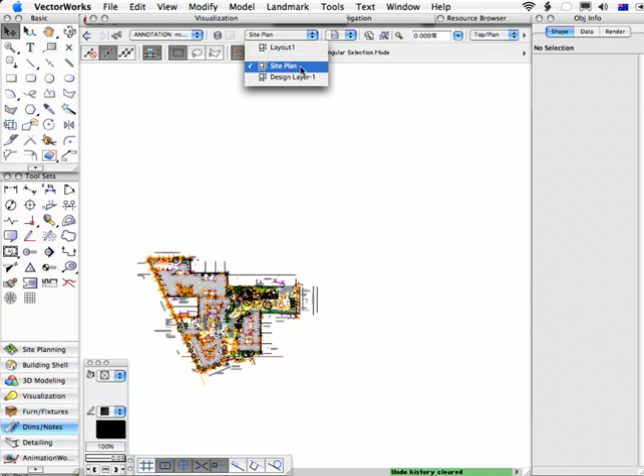And if you do that, then you're going to see the base data that was used to create the AutoCAD file. And let's zoom in here, and you can see that we've got this file imported. Now this looks pretty good, but the next thing that you must always do is to check that it is imported at the right scale.

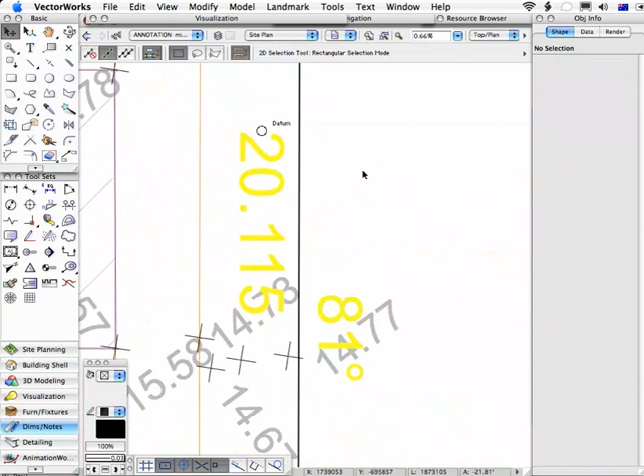And you can see here in that yellow writing there's a dimension written against this line here, and the dimension is 20.115, and that's written on this boundary line from this point here. So if I click on that line, it should say 20.115 in the object info palette, and it actually says it's got 3 zeros on the end of 20.115, which means that this drawing is not scaled correctly.

In other words, it's 1,000 times too big, and that is because unusually this survey file was actually drawn in millimeters. Even though the dimensions are being displayed in meters, the drawing was drawn in millimeters. So there's two ways that you can fix this. You can re-import the file with the knowledge that you actually had to reset the units to millimeters in the import dialog, or you can rescale the drawing.

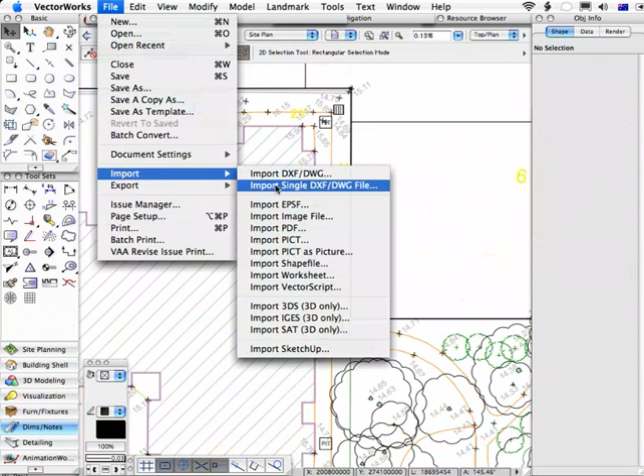So I think you understand what I mean. Let's just go back in here. If we go back to import, single DXF DWG, select the file again, click open. What I'm talking about here is that because this file was actually done in millimeters, in the import dialog, instead of choosing meters in that drop-down menu, we needed to choose millimeters. And we'll just wait for this to load.

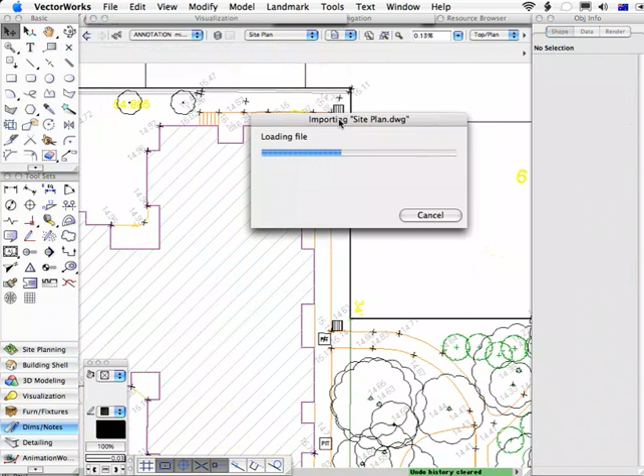So here, instead of this being meters, if I imported this drawing as millimeters, and I'm not going to do it over the top of this one here, then it would have come in at the correct size. And notice that this number, when I changed that, actually became something a bit more reasonable than the other one that was there. But anyway, that's one way that we could resolve it. Just do the import again.

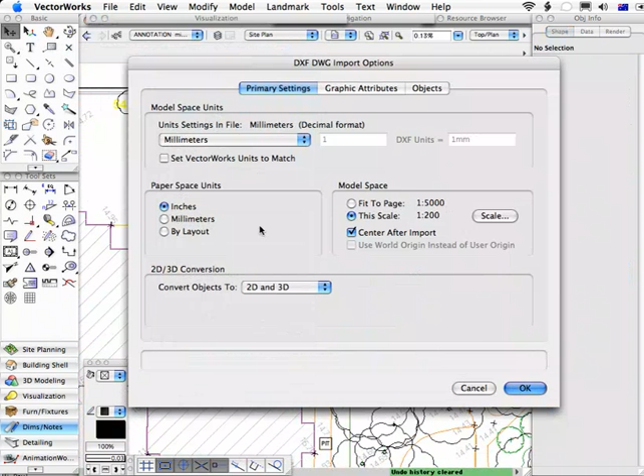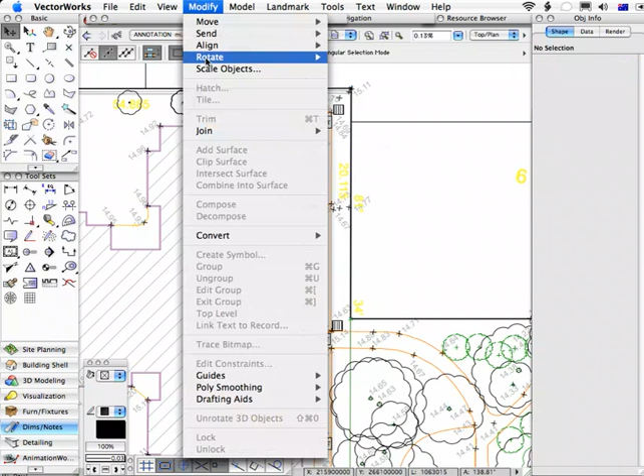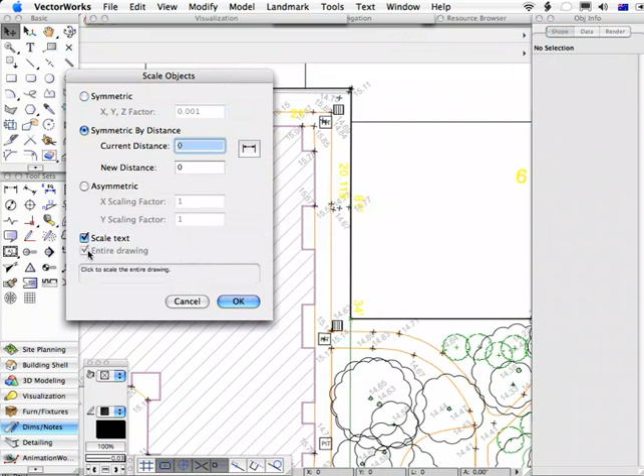But let's say that you have followed all the instructions and you end up measuring something and it's completely wrong. So how do you fix that? What you do is to go to the Modify menu and choose Scale Objects. Now, there's a new feature in Vectorworks 2008 which is this symmetric by distance, and this is what we're going to use. And you'll notice here that Scale Text is on and Entire Drawing is checked, and I can't uncheck it because I have nothing selected in the drawing.

So when you choose Scale Objects and you don't have anything selected in the drawing, it's automatically assumed that you want to rescale the entire drawing, and that includes the symbols and hatches and everything in the drawing, as opposed to just wanting to rescale a particular object. Now, we've got two fields here. We've got to put the current distance in here and the new distance in here. Now we know the new distance is 20.115. So we can put 20.115 in there.

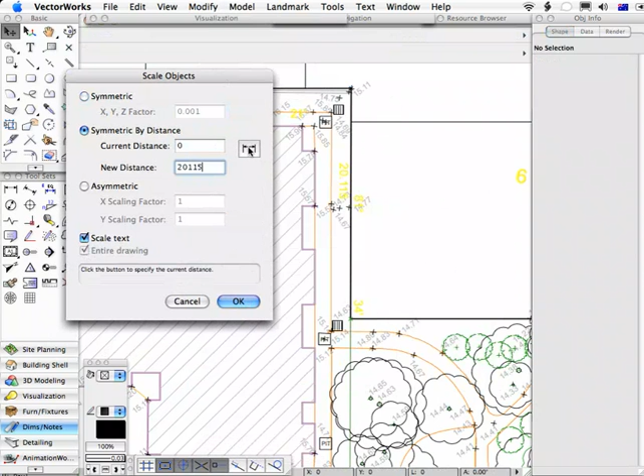And then we're going to measure the current distance, and I could type in that number that we read out here in the Object Info palette. But very conveniently, there's this little button here that allows me to actually draw a dimension over that line. So if I click this button, now I can come onto this point here, click here, and draw a line down to here, click again, and that distance is automatically entered in here.

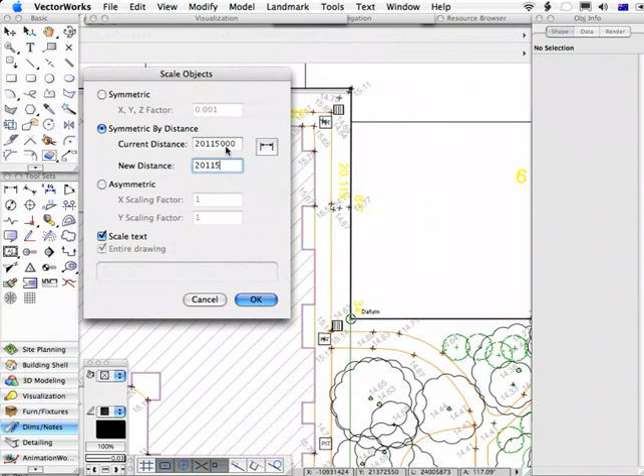And obviously I should have done that before I put this one in, and this should read 20.115. Okay, so the current distance is that, the new distance is that. We then click OK, and the drawing is going to rescale. I'll now do a fit to objects, and here's our drawing. Now let's go in on that same line and see how we're doing. Now remember, it's 20.115. Select the line, and it's 20.115.

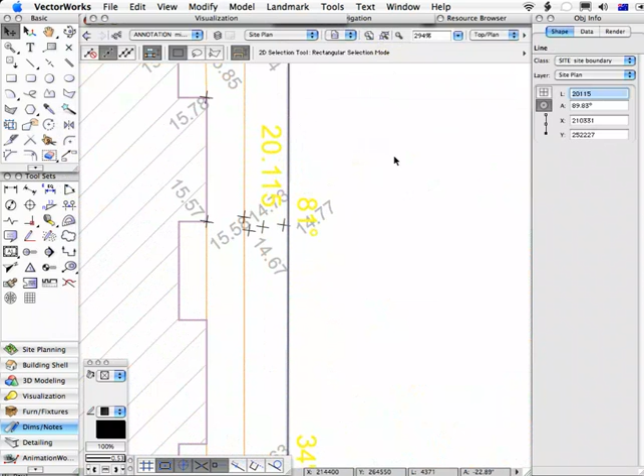So always check the size of something by measuring a known distance on your imported file. If you just start drawing without doing that, you'll have all sorts of problems down the track when you try and print the drawing. Alright, so let's do a fit to objects again with nothing selected, and then we'll just save this file, save as, and we'll call this imported survey, and click Save.

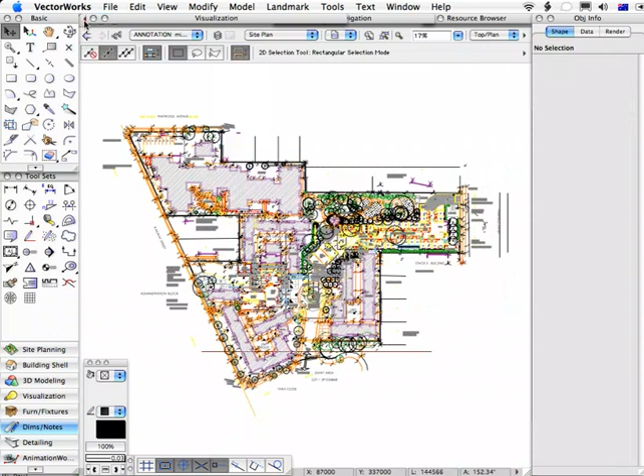Now let's close that drawing down, and I'll now create a new drawing. So that's our imported file. It's imported into a separate Vectorworks drawing. I've closed that drawing down, and now we're going to create a link between our drawing and that drawing. So I'll choose New, and this time I'll use a document template, say this one here, and I'll just resize that page so that it fits in our movie.

So now I want to get that other drawing displaying in my drawing, and the way we do that is we go to the View menu to Create Viewport, and I'm going to name this viewport Survey, and we have to choose a layer to create it on, and we'll create it on a design layer.

And then I want to select the source. We click the Select Source button, and we choose External Document, and we need to click the button here to browse for that, and that file that we just created is this one here. This is the Vectorworks file that we imported the survey drawing into. So we click Open,

and the other option you have to worry about in here is whether or not you're going to save the referenced cache to disk. What this means is if I check this box, then all of the information from this file is going to get embedded in my file, and however big that other file was, let's say it's 10 megabytes in size, then if I save the reference cache to disk, that 10 megabytes is going to be added to my file. And I don't necessarily have to have access to that other file if I want to open my drawing.

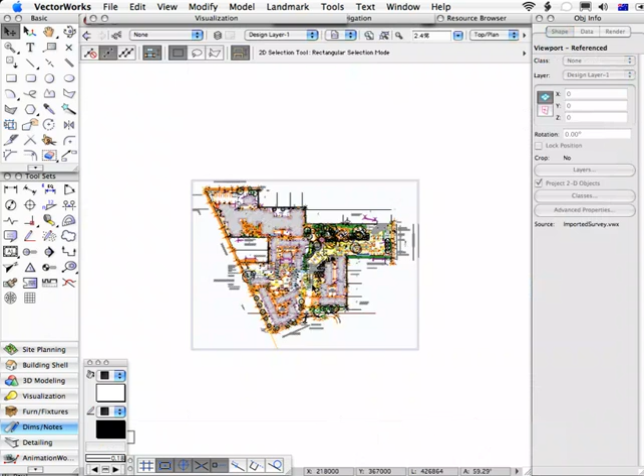Now let's just double check our active layer scale here, and it's set to 1 to 50, so probably it would be more realistic to set it to say 1 to 200. And I'll just zoom out here and position this over our page. That page outline there is A3, by the way. So if I do a fit to page, you can see here that we've got our survey drawing.

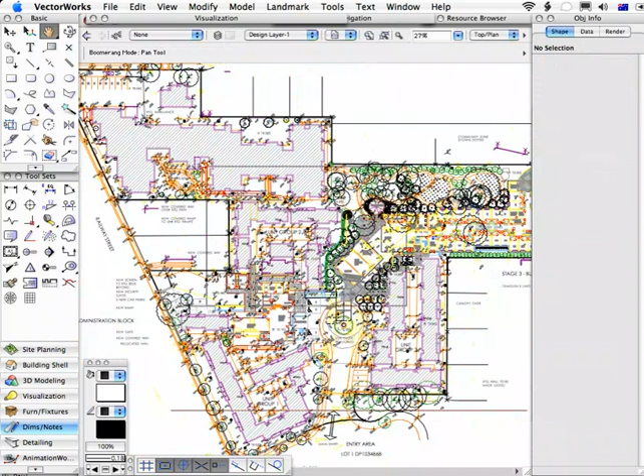Now let's say that you only need this part of the survey drawing here. So what you can do is to double click this, choose to add a crop, click OK, and take, say, the rectangle tool or round rectangle tool or any of these closed surface objects, the polygon tool, and just draw a rectangle around the area that you need, and you'll see the rest of the drawing gets cropped away.

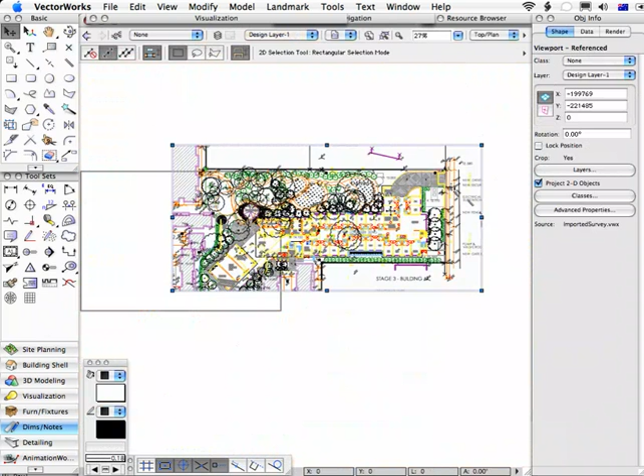Now the rectangle has a line weight that you can see there. If you don't want to actually see that rectangle, you can just choose none from the attributes palette here, and the crop line will disappear. We're inside the viewport crop now. If we click the exit viewport crop button, we've now got a cropped viewport. If I needed to rotate this, you'll see that I've got a rotation angle here. I can do that, or I can use the rotate tool here to rotate this if I need to.

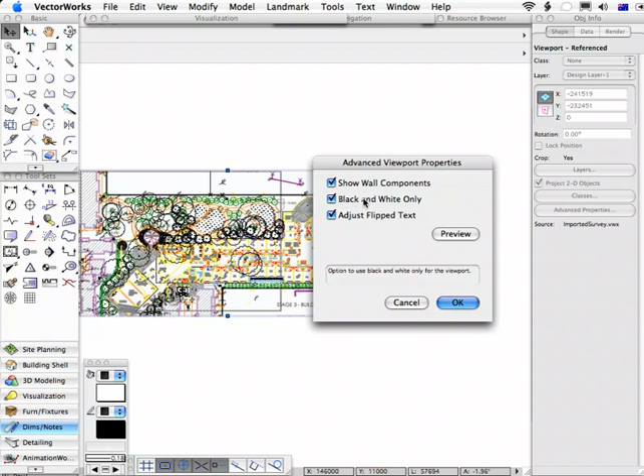Now, under advanced properties here, we have the ability to have black and white only turned on. If I turn that on and preview that, then the AutoCAD file is going to switch to black and white only. And you may or may not want to have that, but that option is available.

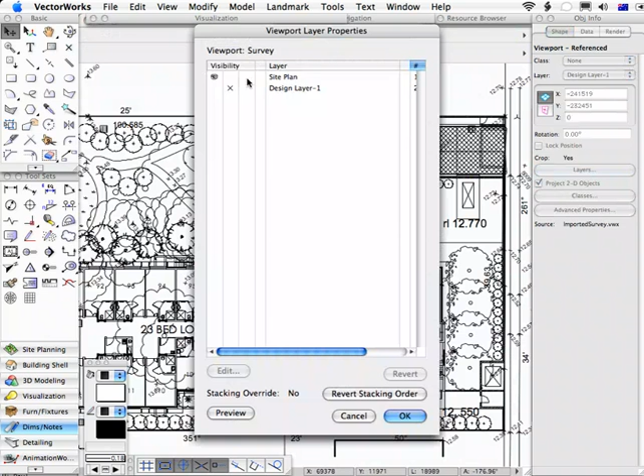And the other thing you might want to do if you're going to overlay information is to tone this down a bit. If you click on the layers button, there's 3 columns here under visibility. This is visible, invisible, and grayed. So if I gray the site plan layer and click OK, you'll see that this drawing actually grays out in the background.

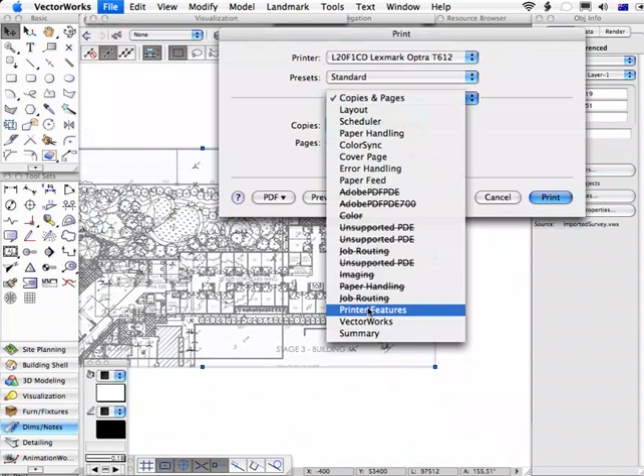And that level of grayness can be controlled when you print the drawing. You'll see here in the print dialog under Vectorworks that you have a grey level and it's currently set to 60%. So if you wanted this to be darker when printed or very, very faint when printed, then you can alter this percentage here.

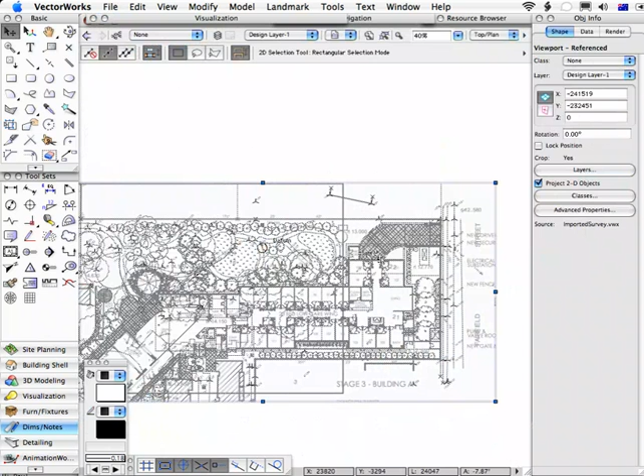Now, one of the really important things about this process of bringing an AutoCAD file into your drawing is that in your class list in this drawing, none of the AutoCAD layers have been brought in. So you have a completely separate class list from all of the classes that are in that AutoCAD file. You can access the classes in the AutoCAD file by clicking the Classes button here, and here are all of the AutoCAD classes.

Now, you obviously are not going to know which ones turn on and off various things, but let me demonstrate by just turning off a bunch of these classes here. And let's preview that, and you'll see that various things disappeared from this drawing. So I can actually control the visibility of objects in the drawing.

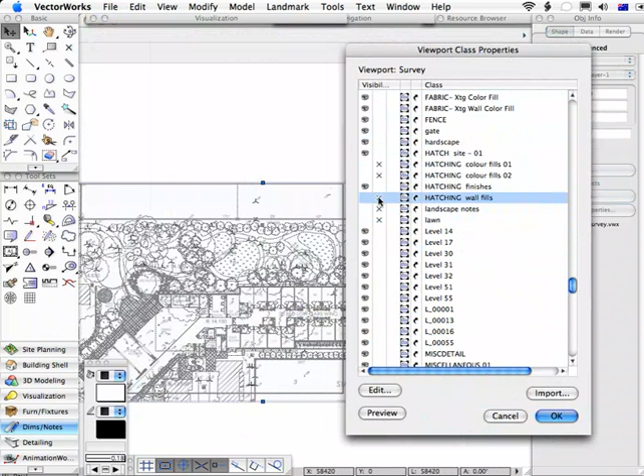Now if we look through the classes here, let's try and do it a bit more logically. You might say, well, I don't want to see their lawn, I don't want to see their landscape notes, I don't want to see their hatching, and so on. Don't want to see their plants, and preview that, and you'll see that gradually you can clear out what you're seeing here. Let's turn off site vegetation, preview that. So gradually things are clearing up on this drawing here.

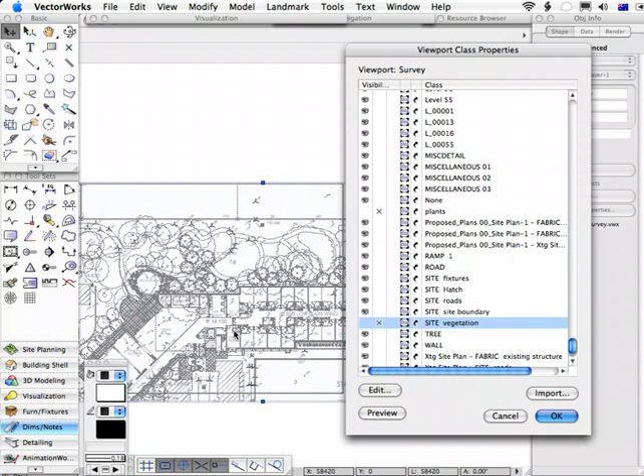Now if you need to be very specific and know what classes are what, then you can always open up this file that you imported and check what classes you need to turn on or off, or even do that as part of the initial process when you import that file. So we've had a bit of a stab at the classes here, but if you're going to do a landscape overlay on this, you probably don't want to see some or all of these trees, or maybe you do. Maybe you don't want to see the text here for the RLs and so on. So how are you going to find out what things you need to turn on or off?

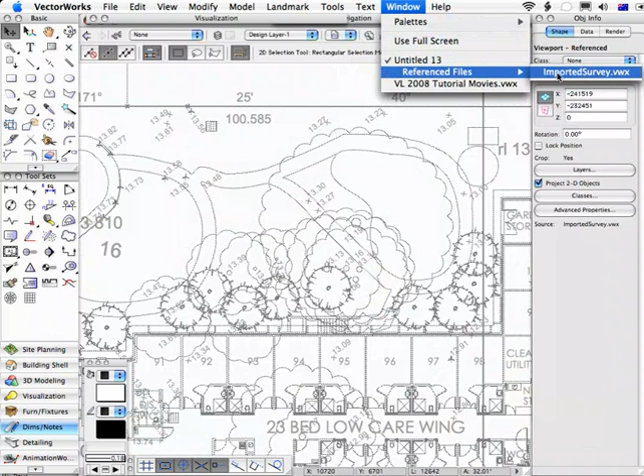Well, in the Window menu, because we have a referenced file here and it's this imported survey, we can actually open the imported survey by choosing that from the Window menu, and then we have the actual survey drawing which is going to open here. And then you can come in here and click on various objects and look at the class that things are in. You'll see here there's a class called lawn, there's a class called site vegetation, there's a class called annotation. So assuming that the drawing has been set up reasonably well, this is a plant.

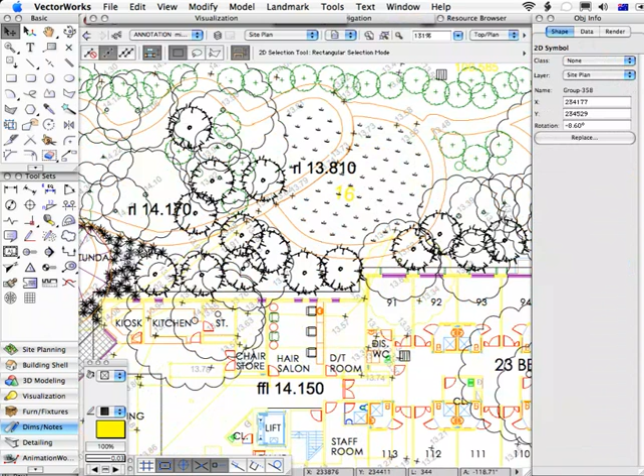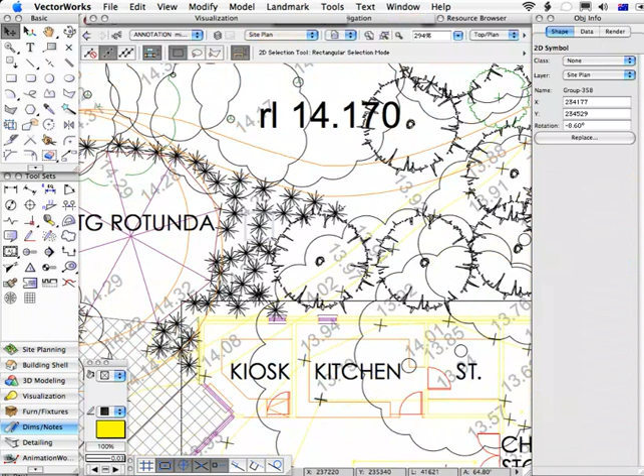Now when something comes up as a symbol, then you might have to actually enter the symbol to see what class the insides of the symbol are in, and you can do that by double clicking. And then I go into the symbol, and this symbol is still in the none class, so it actually hasn't been classed. And that's what I was referring to before. It's all well and good to give you a file that has this wonderful class structure, but very frequently the class structure hasn't been adhered to, and there will be things in the file that you don't need, or that are not classed properly.

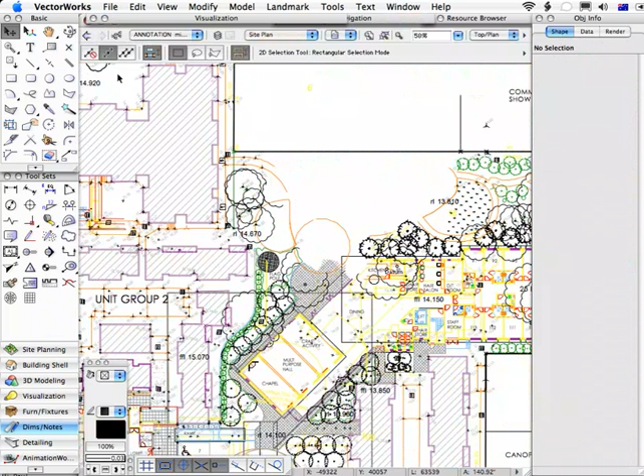Of course, the other thing that you can do is to just delete things that you don't want to see in your drawing just by selecting them and pressing delete, and that will delete them out of the AutoCAD file. I'll go ahead and do this, and then you'll see the results. I'm just randomly deleting things here, but you can see that I've deleted a whole bunch of stuff. If I now save this file, then close it down, that stuff that I deleted is still going to be here until I do an update. In other words, the file that this viewport is referencing, we know is now different to what's being displayed here.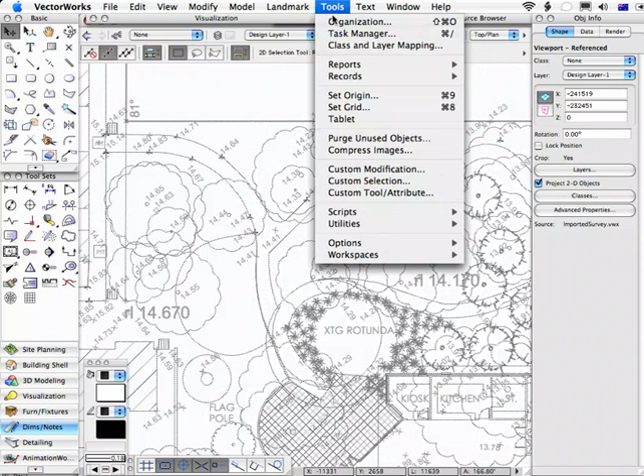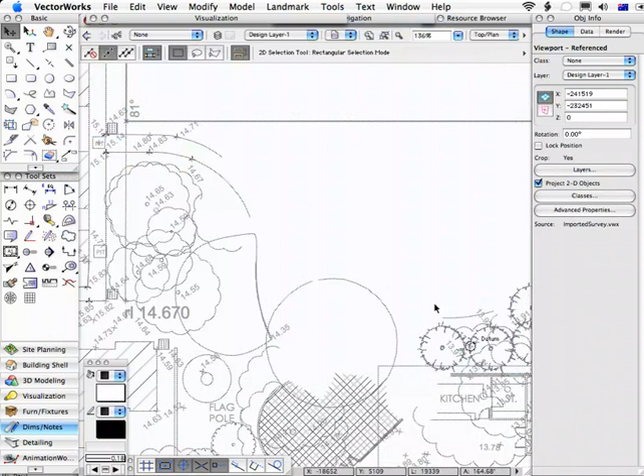If we open the Organization dialog, you'll see in here there is a tab called References, and here is the file that we're referencing, and you can see it's all in red and it's saying it's out of date. So if I select the file in the list here and click Update, Vectorworks is now reading the latest information from that file. This has now turned black and it's up to date, and if I click OK, you'll see that the stuff that we deleted from the AutoCAD file has been removed. So you can either get rid of stuff you don't need by deleting it from the original file, or by turning the classes on or off.

So that should give you a bit of an idea and a head start on how to get AutoCAD information into your drawings.